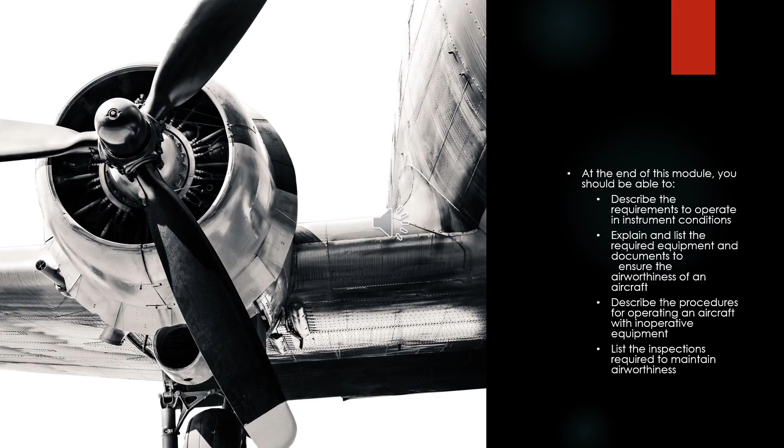So I'm going to start by looking at what requirements we need as pilots to operate in an IFR environment. Remember, IFR means Instrument Meteorological Conditions or Instrument Flight Rules. We have to have an instrument rating whenever we are flying in instrument meteorological conditions, i.e. clouds, or flying in Class A airspace. Class A airspace is the only airspace that requires an IFR rating at all times, so you can't even so much as stick your nose into Class A airspace without an instrument rating.

You also need it to fly for hire carrying cargo or passengers at night or over 50 nautical miles. It can be helpful to avoid any rerouting, rescheduling, or canceling of a flight because of weather, and it's nice to have if we want a margin of safety by having ATC follow us. We can always ask for VFR flight following, but remember, they don't have to follow you on VFR flight following—they do have to follow you when you are filed on an IFR flight plan.

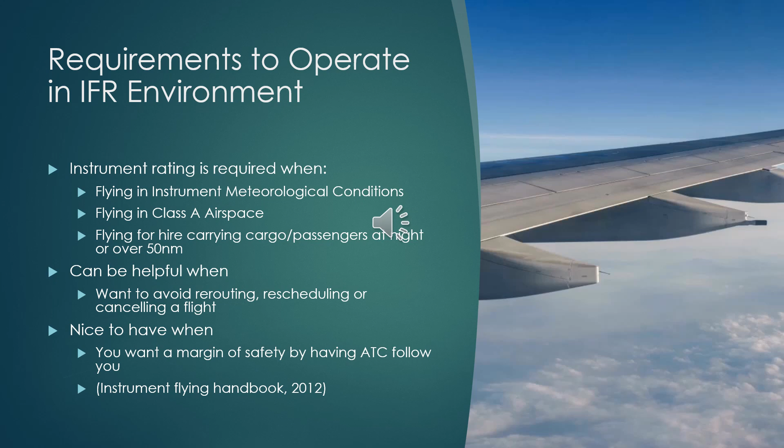Now that we understand what we have to operate in the IFR environment as pilots, what are we required to have for airworthiness? This is required under 14 CFR 91.203.

We have to have the airworthiness certificate—this is the FAA Form 8100-2 Standard Airworthiness Certificate, or the FAA Form 8130-7 Special Airworthiness Certificate—the Registration Certificate, which is FAA Form 8050-3, and the radio station license if we are flying international flights. So if we want to go to Bermuda or fly to the Bahamas, we have to have that radio station license, which is FCC Form 605. We also need the operating limitations, in the form of either the FAA approved airplane flight manual or the pilot's operating handbook, and a current up-to-date weight and balance.

What exactly is an Airworthiness Directive? Under 14 CFR 39, these are mandatory, legally enforceable regulations issued by the FAA. These cannot be overflown—if an AD comes along, you have to make sure you comply with it, otherwise the aircraft is not able to fly legally. You may not overfly this—so if it says it has to be done by 200 hours, you cannot fly it at 201 hours. It usually requires an inspection, repairs, or limitations, but there is usually a provision somewhere to allow operators to fly the aircraft in order to do the work.

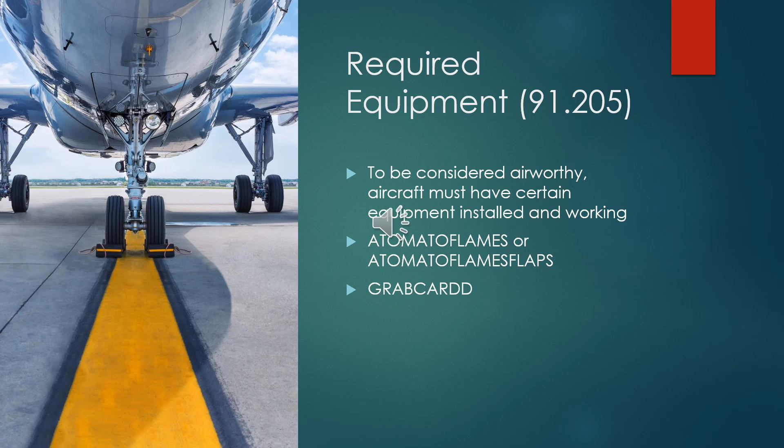In order to be considered airworthy under 91.205, aircraft have to have certain equipment installed and working. You may remember way back when you did your private, the acronym A Tomato Flames, or A Tomato Flames Flaps. We're going to add one more, and that is GRAB CARD, which is usually for IFR.

So if we remember A Tomato Flames, these are the required equipment for day VFR. A, airspeed indicator. T, tachometer for each engine. O, oil pressure gauge for each engine using a pressure system. M, manifold pressure gauge for each altitude engine. A for altimeter. T for temperature gauge for each liquid-cooled engine. O, oil temperature gauge for each air-cooled engine.

F, fuel gauge that indicates the quantity in each tank. L, landing gear position indicator for aircraft with retractable landing gear. A, anti-collision lights must be aviation red or white. M, magnetic direction indicator. E, emergency locator transmitter. And S, safety equipment including safety belts and shoulder harnesses for each occupant 2 years or older.

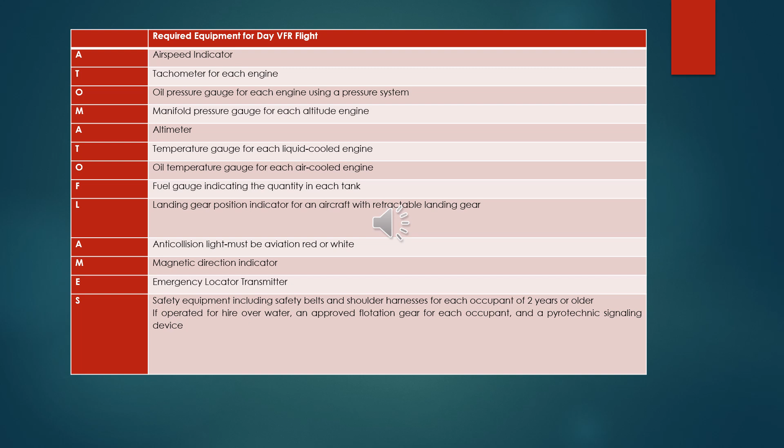If operated for hire over water, you are required to have approved flotation gear for each occupant and a pyrotechnic signaling device. Now we can move on to the required equipment for night VFR flight.

You have to have everything in that day VFR list. Remember we saw A Tomato Flames Flaps - this is where the flaps comes in. You're going to have fuses, one spare set or three spare fuses for each kind required and accessible, a landing light if operated for hire, anti-collision light, position lights, and a source of electrical energy for all installed electrical and radio equipment.

Let's look at IFR. So I put D in and then GRAB CARD - this is how I remember it. All the equipment for day VFR, all the equipment for night VFR.

Now we have to have a generator or alternator, radios, an altimeter that is pressure sensitive, a ball or slip-skid indicator, a clock with a second hand - so technically your Apple Watch or Garmin watch actually doesn't count, you have to have an actual clock with a second hand - an artificial horizon, otherwise known as the gyroscopic pitch and bank indicator, the rate of turn indicator, and a directional gyro.

And if you're flying above flight level 240, or 24,000 feet and above, you are required to have DME, or distance measuring equipment. Now, what happens if you find out that you have some inoperative equipment or instruments?

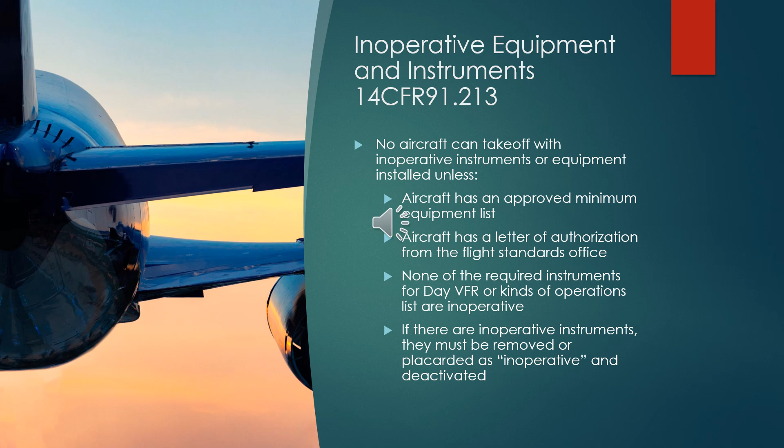An aircraft that has a letter of authorization from the Flight Standards Office, and none of the required instruments for day VFR or kinds of operations list are inoperative - depending on what you are flying, you cannot have those listed as inoperative. And if there are inoperative instruments, they must be removed or placarded as inoperative and deactivated. That's where you get that INOP sticker that needs to be put on top of it.

Now we can look at some of the required inspections. Even though we have complied with all the ADs, we have all of our instruments ready to go, everything works out perfectly, we still have to inspect them. Aircraft have to have specific inspections to remain airworthy.

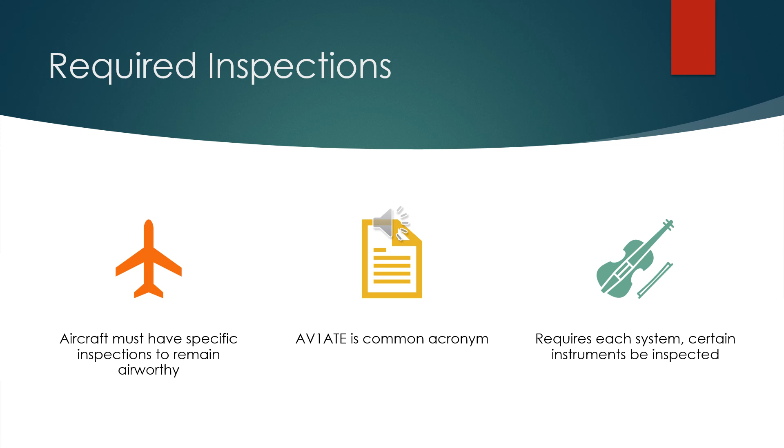We often remember this by the term AVIATE or AV1, that's a 1, not an I, ATE, as a common acronym. It requires each system and certain instruments to be inspected on a specific schedule. So these required inspections include A, the annual inspection including any airworthiness directives that exist. This has to be done every 12 calendar months.

It is regulated under 14 CFR 91.409, and it must be performed by an airframe and power plant mechanic with an inspection authorization. V is for VOR check, required every 30 days.

I is for the 100-hour inspection, required every 100 hours. However, be careful, the 100-hour inspection is only required for aircraft being used for training or for hire. It is not required if you are just flying your Cessna 172 that you personally own. You don't have to have a 100-hour done unless you rent it out. This is under 14 CFR 91.409, and it is performed by any airframe and power plant mechanic.

A is for altimeter and static system, required every 24 calendar months, regulated under 14 CFR 91.411. A manufacturer, repair station, or mechanic with an airframe rating may perform this.

The next one is T for transponder, required every 24 calendar months under 14 CFR 91.413. It may be performed by any certificated repair station, manufacturer, or holder of a continuous airworthiness maintenance program.

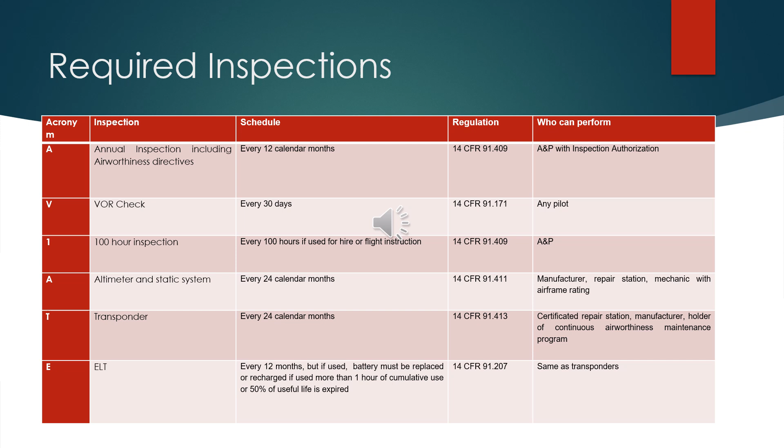So the next thing is to do a VOR check. It must be performed every 30 days, and it can be performed by any pilot.

According to the Instrument Flying Handbook, you are to rotate the OBS to move the CDI from center to the last dot and note the number of degrees of change.

So now, what are the tolerances that we need to note? Plus or minus 4 degrees if it is the dual VOR check, a ground check, a VOT, or testing at a VOR or repair station. If you are airborne, it is plus or minus 6 degrees.

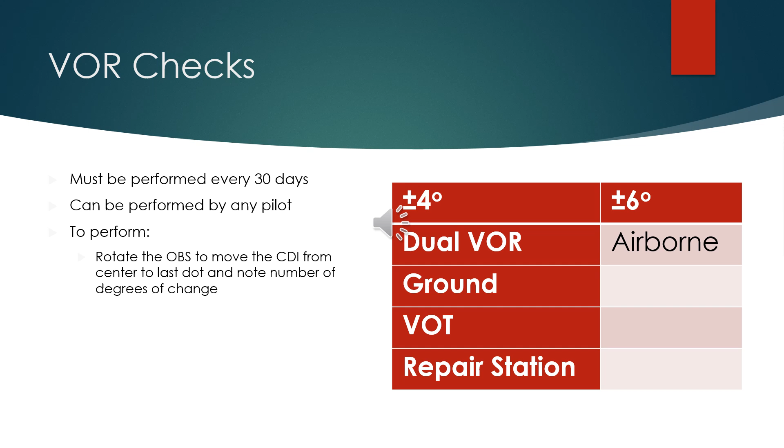So in this presentation, we discussed the requirements to operate in the IFR environment, the required documentation that we need to have on board to ensure that our aircraft is airworthy, the airworthiness directives, any required equipment that we have to have on board, the procedures for operating with inoperative equipment and instruments, required inspections, and VOR checks.

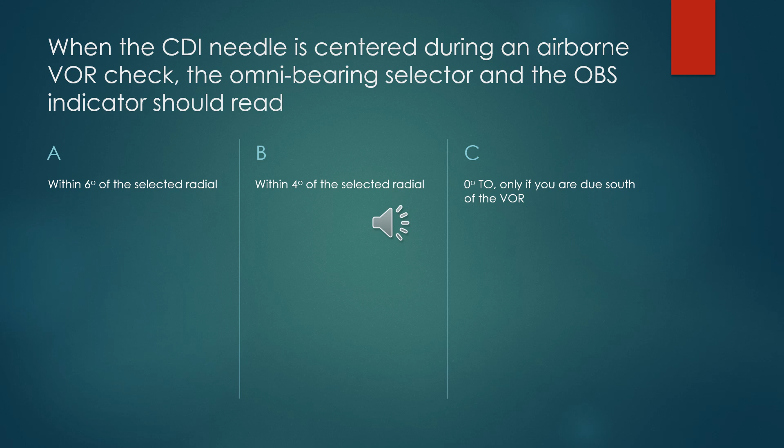So when the CDI needle is centered during an airborne VOR check, the Omni-Bearing Selector and the OBS indicator should read: A, within 6 degrees of the selected radial; B, within 4 degrees of the selected radial; or C, 0 degrees, but only if you are due south of the VOR. The answer is A, within 6 degrees of the selected radial.

Here's the explanation. FAR 91.171(b) states, if neither a test signal nor a designated checkpoint on the surface is available, use an airborne checkpoint designated by the administrator, or outside the United States, by an appropriate authority. The maximum permissible bearing error is plus or minus 6 degrees.

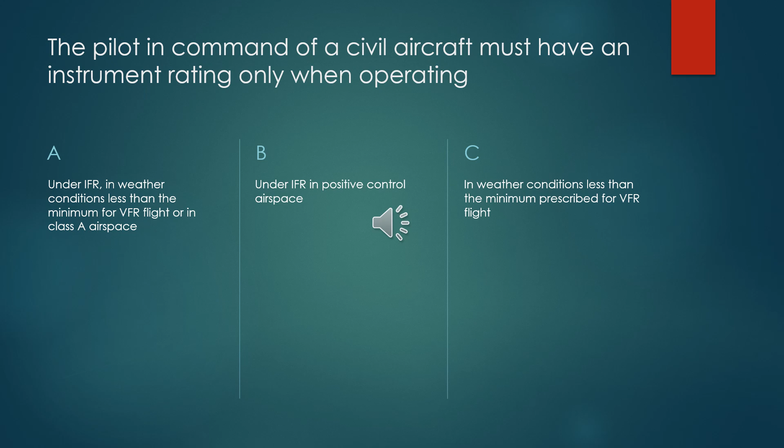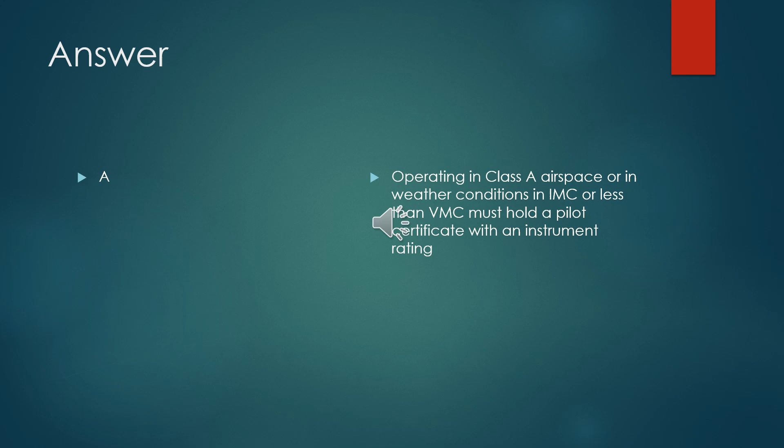The pilot in command of a civil aircraft must have an instrument rating only when operating: A, under IFR in weather conditions less than the minimum for VFR flight or in Class A airspace; B, under IFR in positive control airspace; or C, in weather conditions less than the minimum prescribed for VFR flight. The answer is A. Operating in Class A airspace or in weather conditions in IMC, or less than VMC, must hold a pilot certificate with an instrument rating.

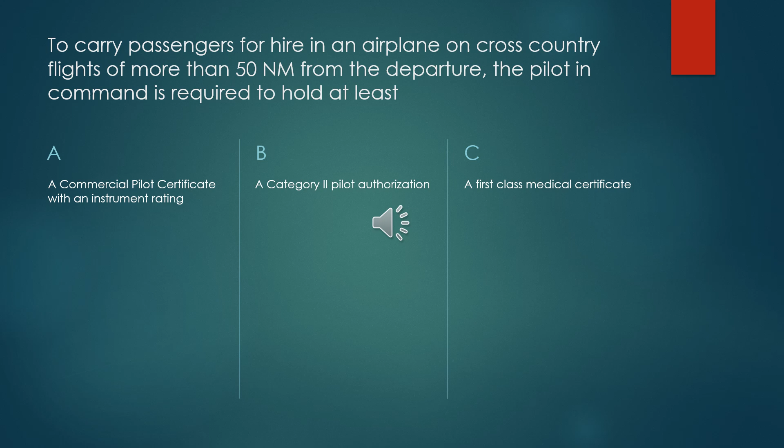To carry passengers for hire in an airplane on a cross-country flight of more than 50 nautical miles from the departure point, the pilot in command is required to hold at least: A, a commercial pilot certificate with an instrument rating; B, a Category 2 pilot authorization; or C, a first-class medical certificate. The answer is A. To carry passengers for hire on a cross-country flight over 50 nautical miles, or at night, you require a commercial pilot certificate with an instrument rating.

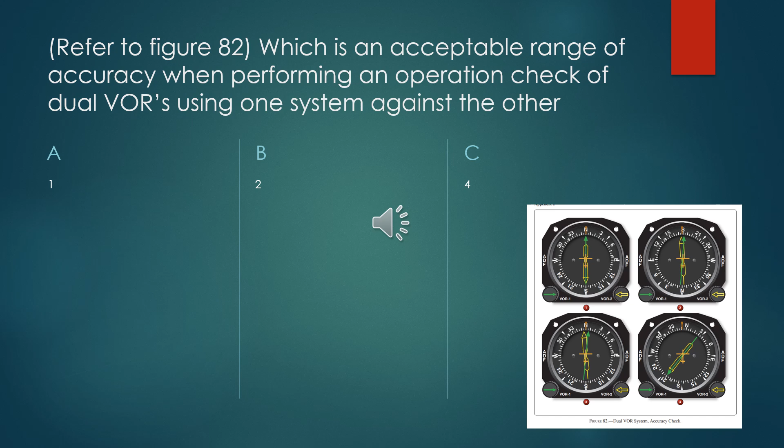We refer to figure 82 in the corner, which shows an acceptable range of accuracy when performing an operational check of dual VORs using one system against another: A, 1; B, 2; or C, 4. The answer is C. For a dual VOR check, the acceptable tolerance between 2 VORs is 4 degrees. RMI number 4 shows this. Both VORs show a 210 bearing to the station.